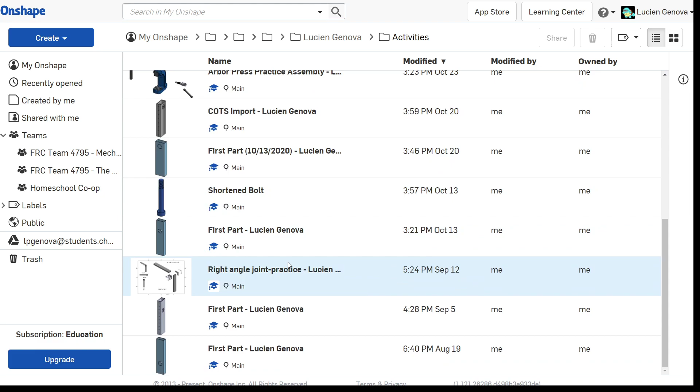So we'll go here to our team, and I'll go to off-season 2020, and I'll go to my folder, and we'll go to our projects folder. Now I got the activities folders. That's going to be full of all the activities I've been doing, because I have been doing multiple of each one, both practicing, developing them, and also filming these videos. But we'll go to our projects folder, and I'm going to go to Project 1, 2017 ball intake, and that was the task.

Reviewing the task, actually, let's do that real quick. What was our task? I'm doing this because keeping the task in mind is super important. What is your task? What does it mean? And how can you fulfill that task? That's what you figure out when you're designing. So the task this time was to intake balls, get them from the ground onto the robot, these little yellow wiffle balls from 2017. And I'll link the game reveal video from 2017 in the description so that you guys can watch that.

So we looked at some existing working solutions. I took pretty heavy inspiration from the Robonauts design, although I used some different geometries, some different configurations. Tried to make it a little bit simpler. I'll also link this playlist of robot reveals, that way you guys can do your own research, because doing research is an important part of design as well. It's one of the most important parts, because identifying the task and then identifying how other people have done the task, that's the way it goes.

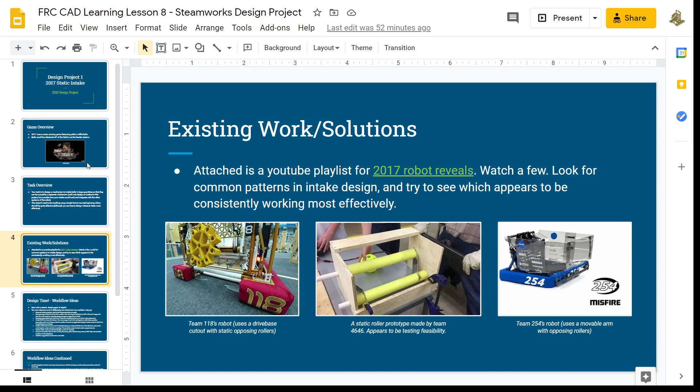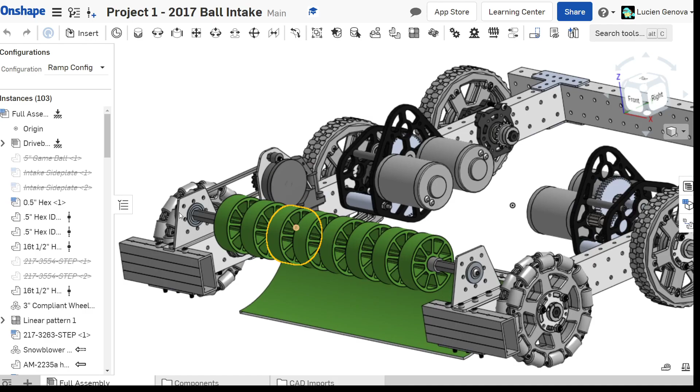Yeah. But yeah, so basically the task was to intake the little yellow wiffle balls from 2017, from the ground onto your robot. That's the gist of it. So here we have our intake, right? Starting off, it's a very basic design. You've got this shaft, which is spun by this motor by a chain. They're connected by a chain.

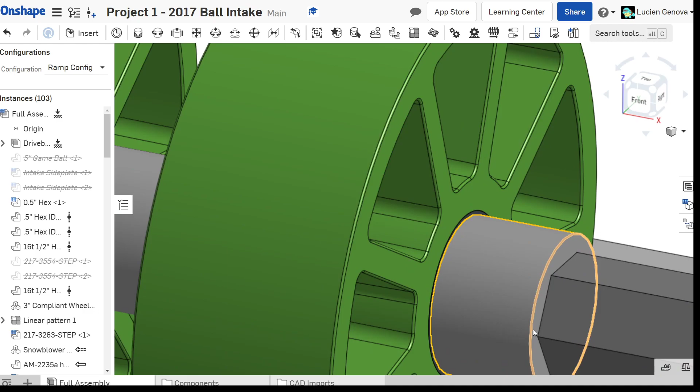And when you spin this motor, the shaft rotates. And this shaft is going to have wheels on it. If we go ahead and select this face here, we can rotate this around, and we can see this shaft can rotate around, and it would actually be going the other way. The shaft rotates around, and you've got wheels, you've got a ball that gets sucked up in there, right?

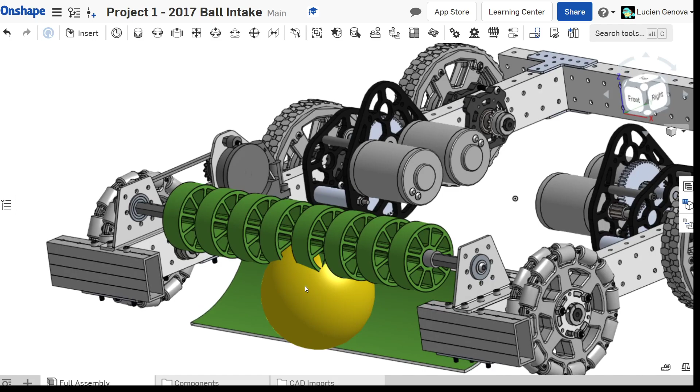So if we go to our demo configuration here, we can see that we've got a ball that's attached right in here, and it's just sliding along this ramp, moving upwards. If we go to the right here, we can see. Here, I'll do a section view so we can see it a little bit better. Move this down a little bit. Yeah, just like that. All right.

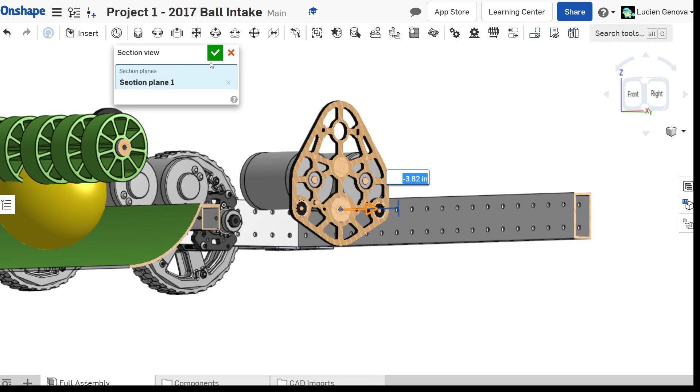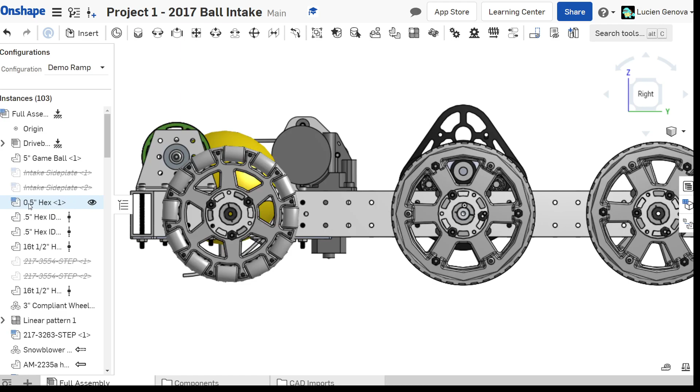Right, so we can see that this ball can move up and down along this ramp, up into the robot. That's the gist of it, right? Starts on the ground, your robot rolls up to it, and pulls it up this ramp right into the robot. So I'll turn off the section view there. It's kind of killing my computer, but yeah. And we'll go to our ramp config, and we can start to analyze this.

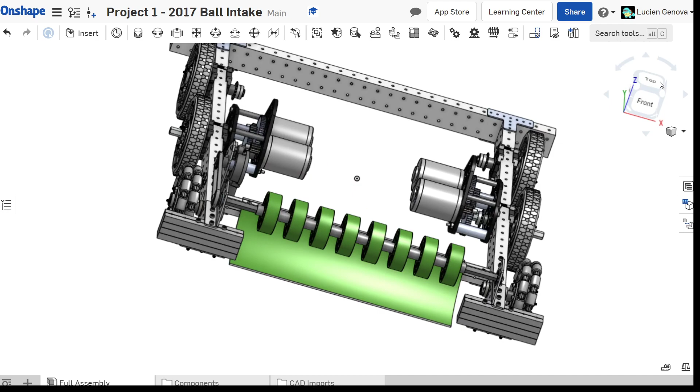So I'll go through my workflow first. The first thing I did was I made a sketch, and I sketched out everything that I was going to want to do, and I worked through that until I had a layout that I liked. So I did pretty much a top-down sketch from here. I want this frame cut out here. You have to have this much space for bumpers in the regulations, but I put this frame cut out here, and then I had a shaft mounted here with rollers on it, and then a motor.

Oh my God, what did I do? Oh, I made a new tab by accident.

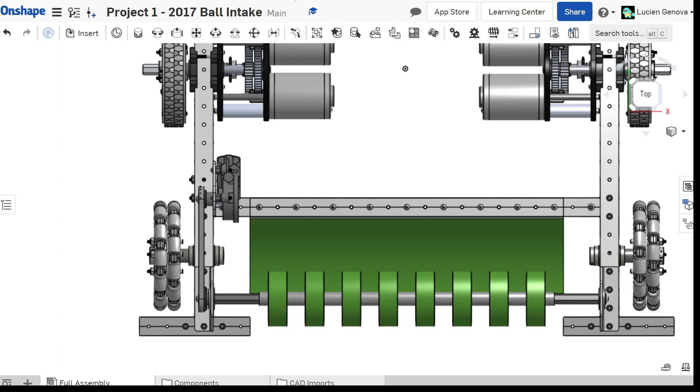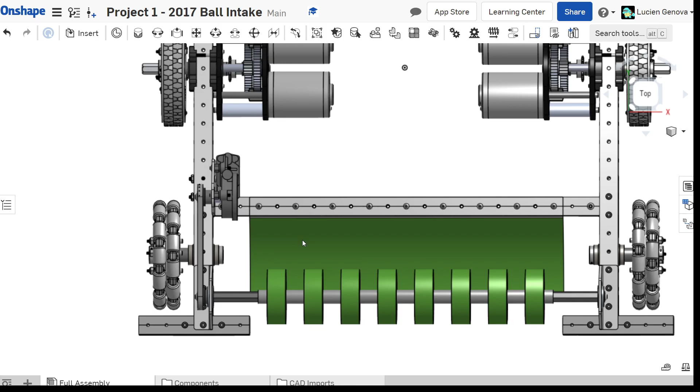Okay, so I had a shaft right here with rollers, and then that connected to a chain, and then that connected to the sprocket, which drove this roller shaft. And then you got some sort of backplate with some sort of sticky compressible material. In this case, a cut-up piece of yoga mat would work very well for this application, because these wheels are also compressible and a little bit sticky.

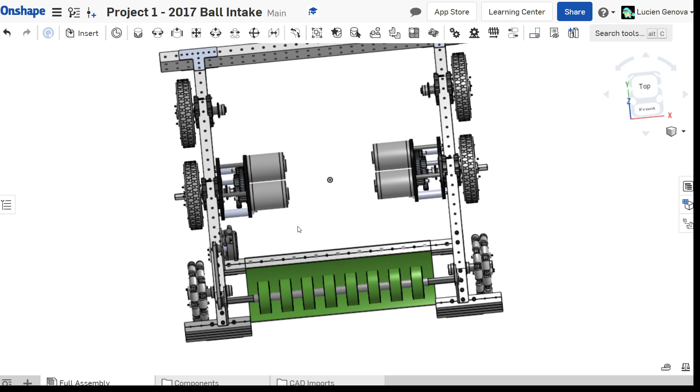They're squishy. These are AndyMark green compliant wheels, and the green ones are the squishiest. That's a common fact. So that's the gist of it, and I did that in a sketch. Because especially with common off-the-shelf components, this component here is at a set height, you can't change that. And this height matters, because that's the height that you come onto the ball at. So figuring out that spacing before you're constrained by common off-the-shelf components is super important.

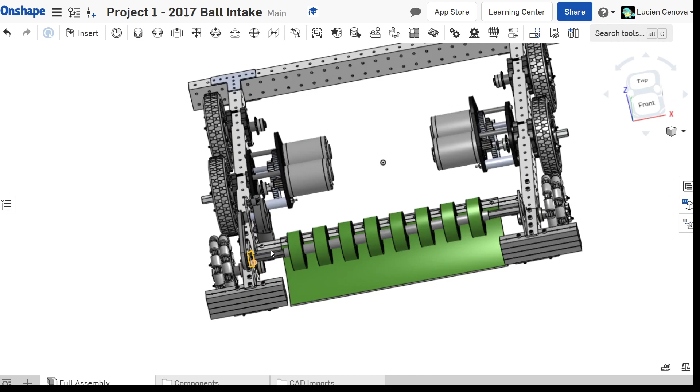So the first thing I did was I made a custom component. I made a custom side plate that housed all of the geometry I wanted. And I'll show you guys that. It's going to be here in intake, in intake side plate. This is the side plate here.

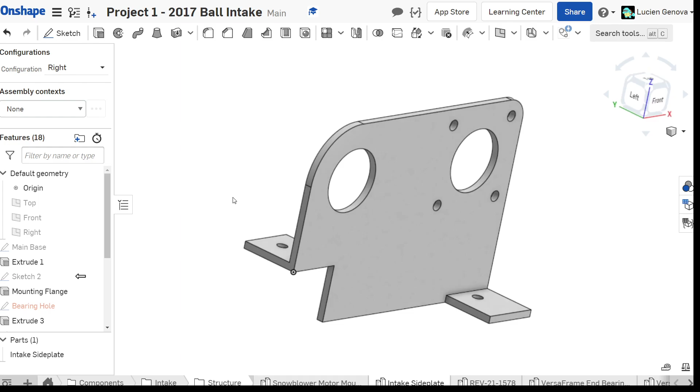If we switch our configuration to our right side here, we can see that there's a hole here for a bearing, and there's a hole here for another bearing with motor mounting holes around here. That would be mounting for a VersaPlanetary with some sort of motor on it, and there would be a chain running between these two. That's the basic gist of it, right?

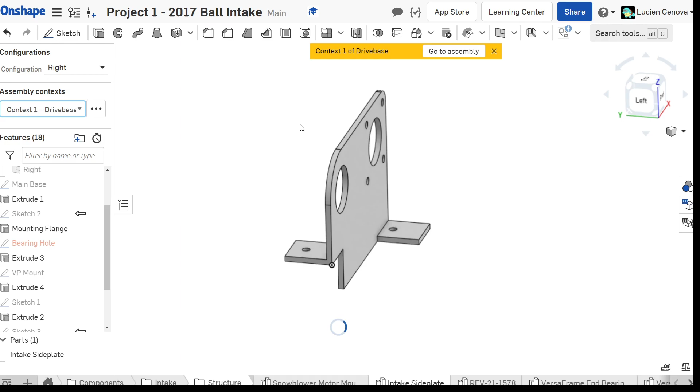And then this spacing from here to here is driven by where you want your rollers to be in proportion to the ground, which is also in proportion to where the ball is. But yeah, so I'll look ahead and go to this context. Now this is going to be an older context, so this assembly is not going to be updated, right? This is an older version of the assembly.

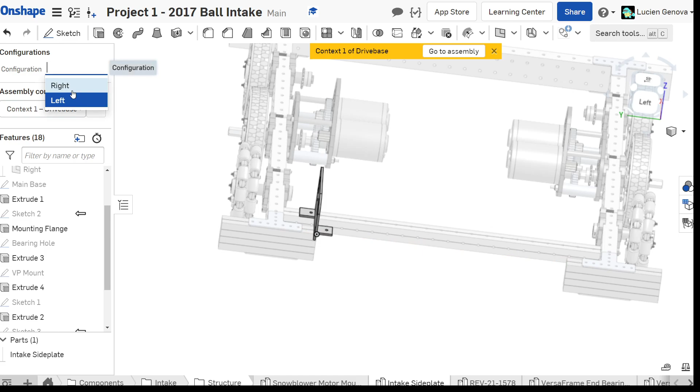This bar is closer, and this thing here, you can see how it's mounted, right? You have a flange coming out for the mounting here, and a flange coming out for the mounting here. That's the main gist of it. If we go to our left side configuration, actually no, our left side configuration wasn't on there, right? Our right side configuration, just like that.

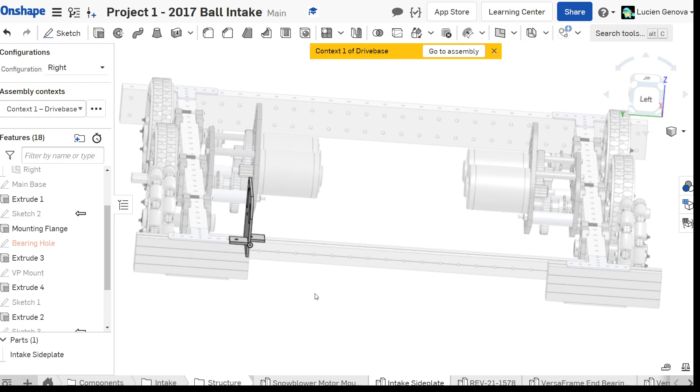And then you would have a roller, right, coming out of here, and then your motor would either be coming out this way, if it can fit within this space here, or this way. And the problem with it coming out this way, actually, is that you'd have to extend this frame, because if you wanted to intake balls there, they would come up and they would hit the motor as it came out, right?

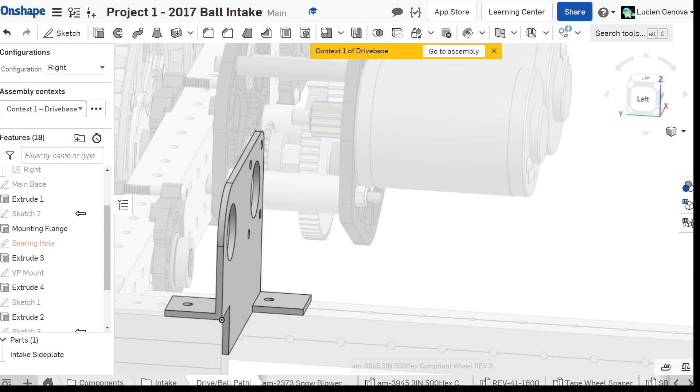If we go into drive and ball pathing, right? If you've got some sort of VersaPlanetary like this, and it's mounted on this bracket here, that would be sticking out this way, you're going to block your ball's path. And I'll show you, let's see, here's our UltraPlanetary as well, and you can see that's sort of the same format, right? Short little gearbox and a motor on the end.

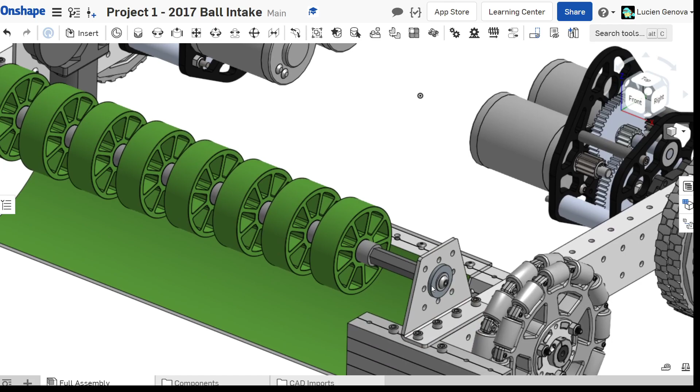So if we go back to our assembly, this is actually in the drive-base context, but we'll go here to our full assembly, and I'll overview a few more things about this design. All right, we've got our snowblower motor here, which drives the sprocket, which drives this roller here, and then we've got these common off-the-shelf brackets from AndyMark that hold this roller shaft on.

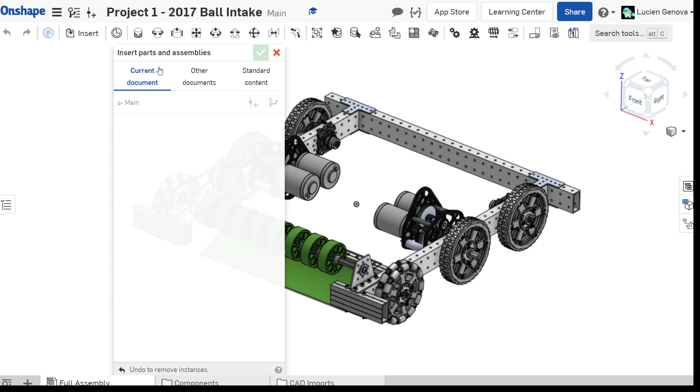So the first thing I did was figure out the geometry, and the next thing I did after that was I went ahead and looked. I was like, okay, so how can I get this geometry into a thing that's actually practical? Of course, you could make the intake side plate, go ahead and insert this in as a reference. You could make the intake side plate. It's not impossible to do, right?

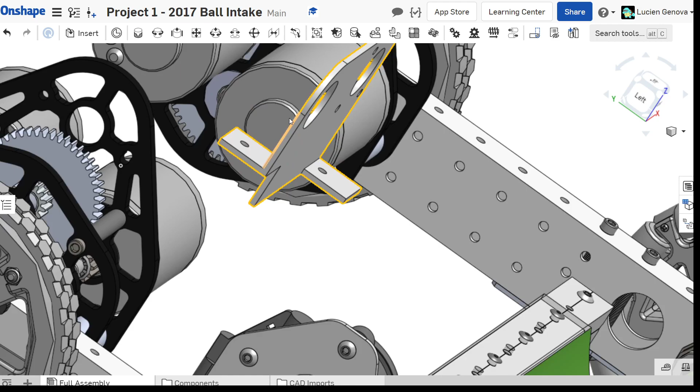This is just a sheet metal part. There's a flat part, and then you bend this flange out and drill a hole in it, and then you bend this flange out the other way and drill a hole in it. They're 90-degree bends in 1/8" sheet metal. It's actually pretty easy to do, and there are ways to represent it in CAD so that it has a flat pattern, so you could use that to cut it and then bend everything.

There are ways to do that, but I didn't actually want to use something like this because you don't need it, right? You have something that you can buy, and that's much easier than making this. You can make it, but you don't have to. And so, you want to give the mechanical team the easiest job they can have. Of course, that shouldn't be at the expense of your design working.

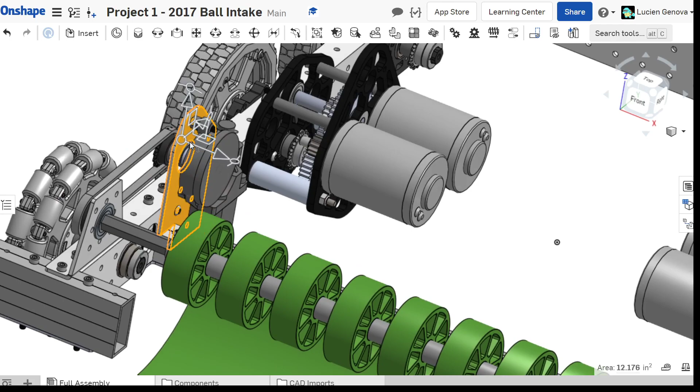I do have a custom sheet metal part here, and that's to mount the motor here. And there's a very good reason for that. The reason being, there is a custom part to mount that motor. I'll go ahead and delete that. There is a custom part to mount this type of motor, which is a snowblower motor. You can see it's got a little motor shaft down here, little motor can.

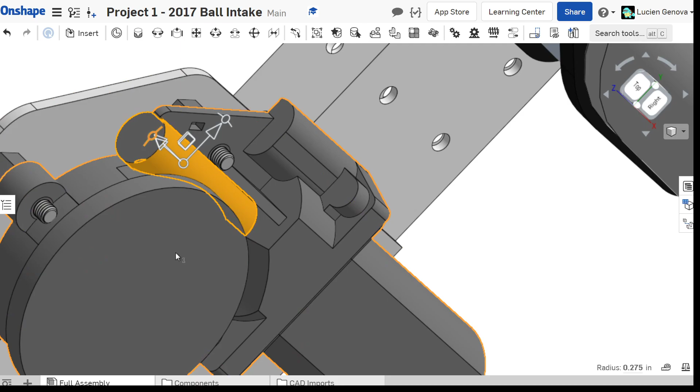Then you've got this thing coming up in here, and you can see the geometry. You've got your worm screw, right? You've got a worm drive, which is basically just like a screw. And then you've got a gear in here, and that screw spins this gear, and it gives you an output of about 100 RPM, so 100 revolutions per minute.

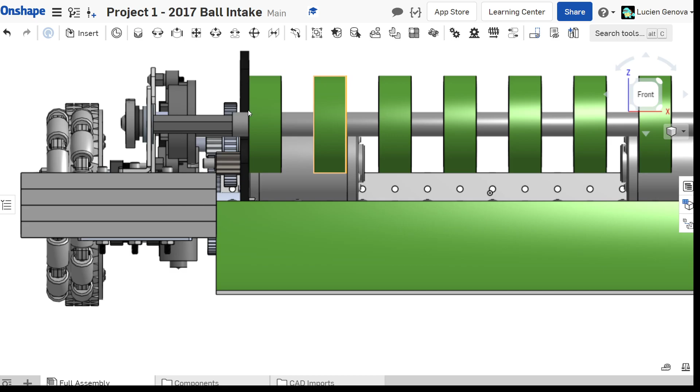That's a really good speed for an intake like this, and it gives you some good strength on that snowblower motor. So that's a cheap alternative, and I also chose it because it fits within this frame constraint, like what I was talking about before. Otherwise, you'd have it sticking way out, right? It fits within this frame constraint, and that's very important. It's also not too large. Like, the size is up and down, and that's much better than it being side to side.

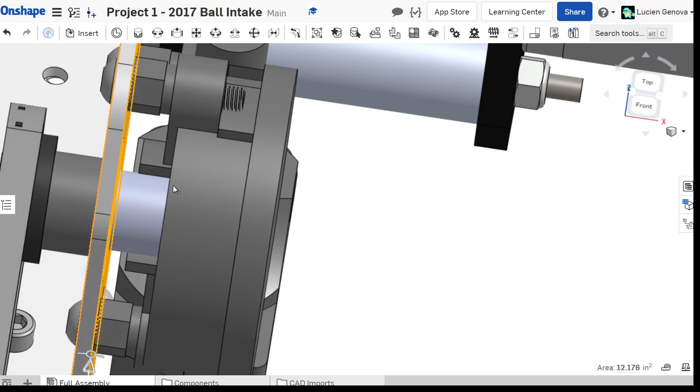But yeah, so the reason I made this sheet metal part here, and this is mounted with standoffs, because it has to be a little bit away because this motor comes out farther than the mounting holes, which seems like a silly design choice, but that's how it is. So you've got this, a very simple thing. You've just got holes here to mount to the chassis, and then you've got holes to mount to the motor. It's a very simple part.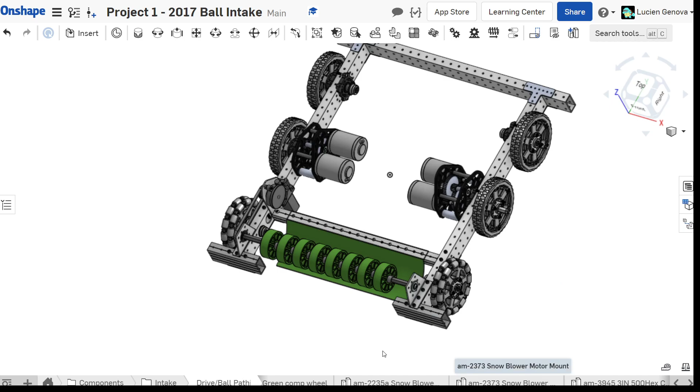If we go to our components and find our snowblower motor mount, there's the motor itself, right? Here's the mount. You can see that this mount is actually up and down. The triangle is up and down. And if you look at our snowblower motor, that would stick out sideways. And we don't want it sticking out sideways, we want it sticking down.

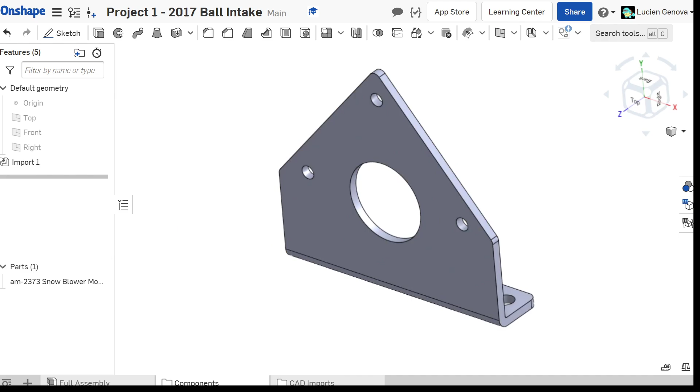Because that's much easier to manage space-wise, and I don't want to give all the other designers a hard job because I decided to take up too much room with my design. Like, that's kind of a dick move, right? You don't want to do that. So you want to use as little space as possible, especially on a robot like a 2017 robot where most of the space inside of the frame is dedicated to storing balls, right? You want to be able to do that as effectively as possible, so something that's sticking way up isn't going to be ideal. So that's why I didn't use a COTS component there, instead using this.

And it's also fun to give mechanical team a few headaches and nightmares, but also learning experiences and jobs, right? Them having jobs to teach new mechanical members is pretty important. So yeah, they should have something to do. That's at least the mentality there, right?

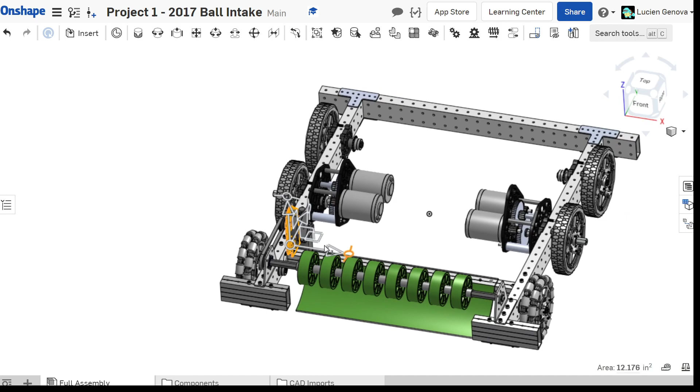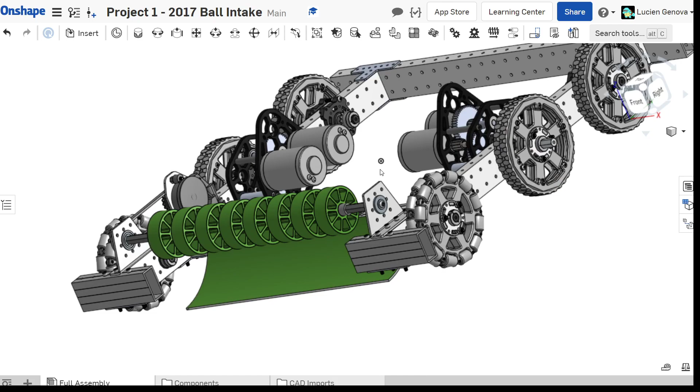And then I've got this back plate here, which is just designed out of polycarbonate, and it mounts off of this central support. And this central support actually has a few functions. First, it serves to mount this back plate off of, right? As I showed before, the ball kind of rides up that as it goes into the robot, and these act sort of like a revolving door, these spin, and then they make the ball roll up this ramp.

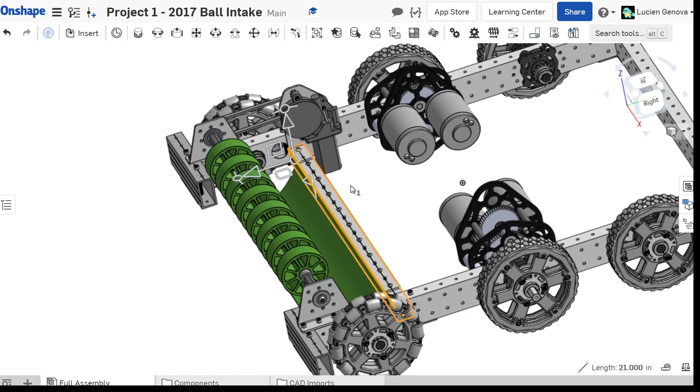But then you've also got this cross member here, which also has a few functions. The first function being to mount this back plate, right? You've got a bunch of rivets mounting that. And then the second function being to strengthen your drive base. That is really important, having a strong drive base, because without this, if we go ahead and hide this, I'll show you.

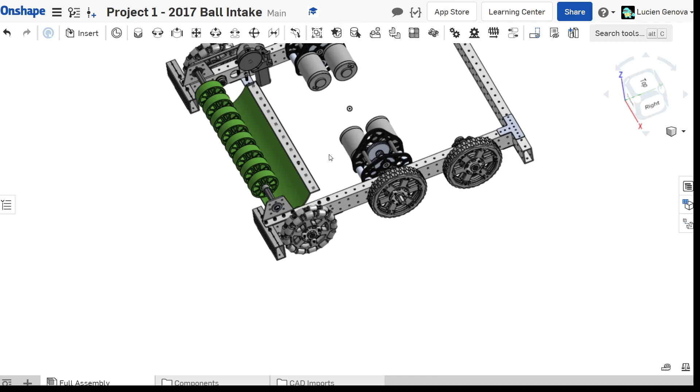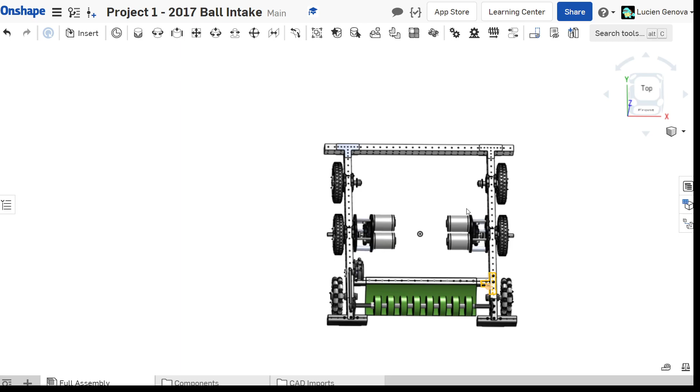Without this, the drive base, if you went on top of it like this and you squeezed it this way, that would be bad because it would kind of become a triangle, and you don't want a triangle drive base, right? You want a drive base that works, and the wheels shouldn't be pointing inwards. So you want some sort of structural frame member there, right? And if you have a cutout in the front, you usually need that behind the cutout. That's the idea, at least. And then it also acts, like I said before, to mount this backplate here.

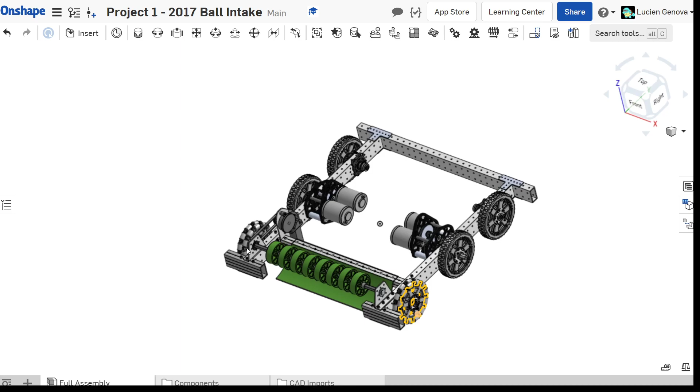Okay, so that's basically the overview of the design, right? I didn't want to make it too complicated of a design. It's quite simple, actually. Just got a shaft mounted by bearings. You need bearings for rotation, usually.

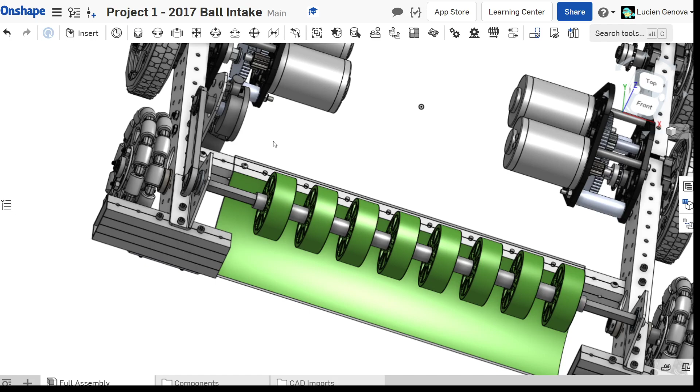To these common off-the-shelf brackets, and I decided to use them because they sort of gave me the geometry I wanted. That's what you're looking for. Finding common off-the-shelf parts that fit the geometry you want is pretty important, and it's one of the longest processes because you have to look on different websites, try different files out, and just see what's what. That's why making custom components like this is sometimes the way to go. If you can't find something that will do what you want, sometimes you have to make a custom thing. That's just the reality of it.

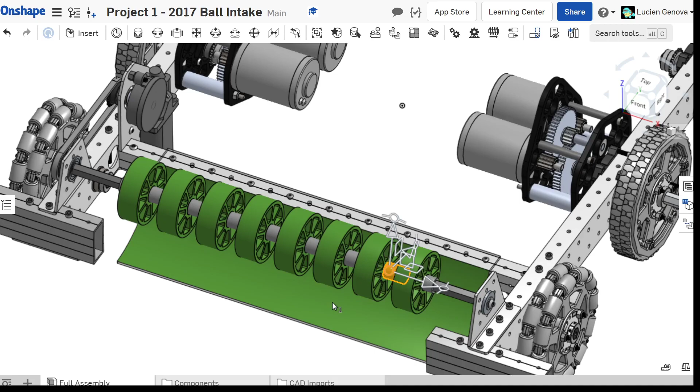But yeah, I've got a COTS component here, shaft here, and then these AndyMark compliant wheels are COTS, and then these things in between them. This is actually duct tape, just a CAD representation of duct tape. That's what we use in our design, and it actually works really well. It serves to keep these from moving axially with the shaft, keeps them from moving this way.

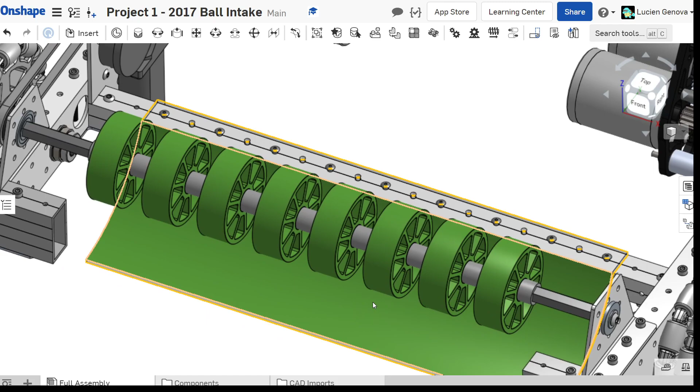It just sticks onto the shaft, and then we wrap it around till it's tall enough to keep the compliant wheels from moving. Saves us a lot of money on shaft collars in between all of these, and the spacing doesn't need to be precise, so we just cut roughly an inch and mount them between each other, just like that.

Now, I didn't spend too much time editing the drive base for this, because if I wanted to design a good drive base for this game, I would have. This is not really an ideal drive base for 2017. You'd want smaller wheels, gearboxes farther back or lower down, basically give you as much space inside of the drive base as possible. But that wasn't the task. The task was just to make this mechanism and design it in a drive base context, without doing much to the drive base. Just make this mechanism feasible, make it so that it can work. Make a mechanism that does this task. So that's basically how it went.

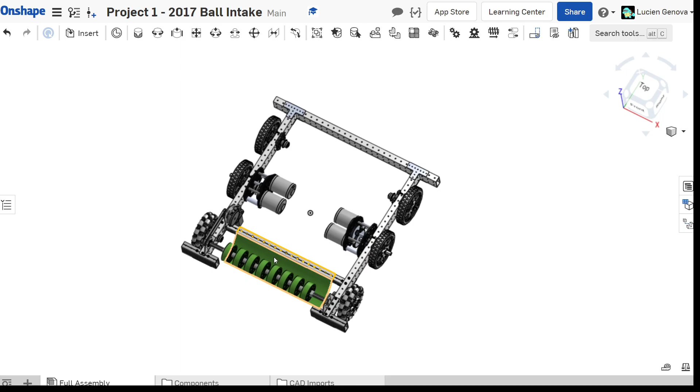So now I'll get into the second portion of the video, which is just a design review of the concept that we had. I'll be looking at this from a neutral perspective, and I'll say some pros and some cons of it. What could be better? What's bad? What's good? And what could be improved? Good, bad, and the ugly. Although I don't think it's too ugly. I like the little green accents here.

Yeah, so starting off, from a neutral perspective, this is the role-playing portion of the video. I'm stepping into somebody else's shoes, although I am alone in my bedroom filming this, so it may have other connotations. I'm just going to use the word design review for now. Basically, I'm just going to come at this from a neutral perspective.

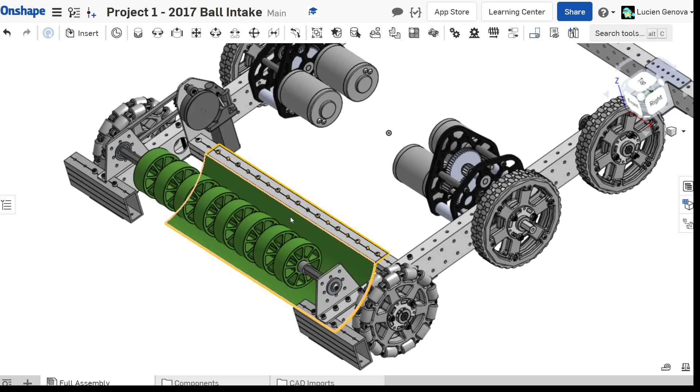So, starting off, what are some things I see? Does it fulfill the task is my first question, and I think it would, because this geometry looks pretty tried and tested. You would have to test this in prototyping, and you would want to prototype this mechanism pretty heavily, because there's many things you need to test mechanically, like how compressible are the balls, how much squish do you need on the balls?

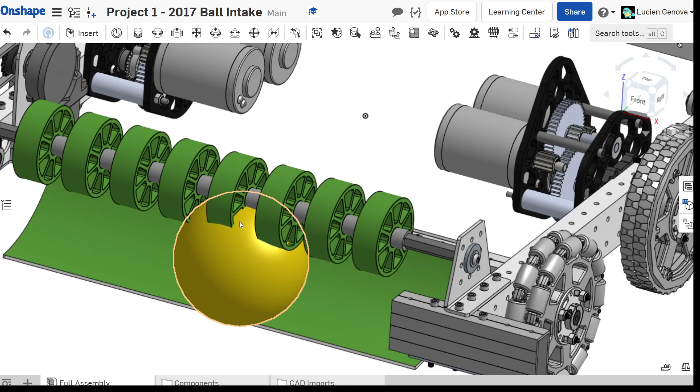What material should you use for the compliant wheels? There's different colors of compliant wheels with different hardness ratings, and the green ones are the squishiest. That's common knowledge. But you could test, should we use harder ones? Should we use smaller compliant wheels, or move this up? I would say it might be good, because this ball is almost touching this shaft here. You'd probably want to move this up about an inch just to offset it so that this spacing worked a little bit better.

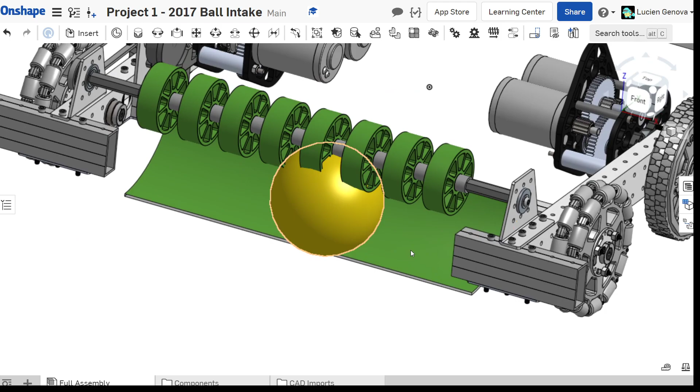You'd also want to test if a yoga mat backplate here really works to draw the balls in. I don't really see a reason why it wouldn't work, as long as it's sticky enough to grab onto the balls. But maybe stuff slips out, or maybe stuff jams. That's totally possible. So it's worth looking at, does this actually work?

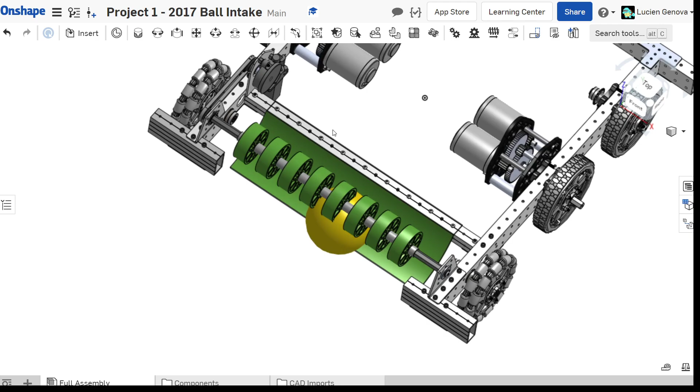And that's something you want to test in prototyping. First, you test feasibility, like, does this work? And then second, you test specific things like spacing and material choices.

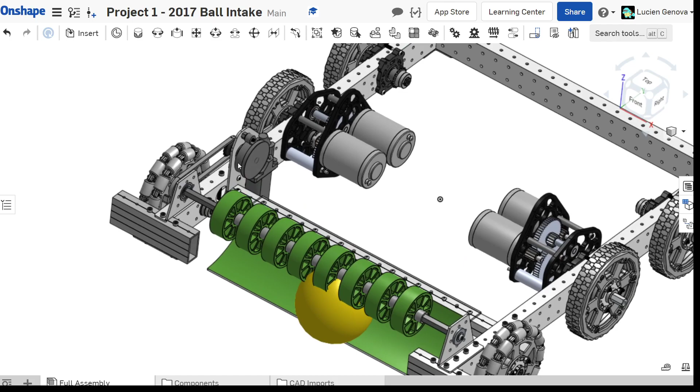All right, next thing I noticed about the design, I like the use of the snowblower motor. I think it fits pretty well with the design. One thing I would say though is that it could be moved over to the other side, right? This snowblower motor, if you flipped it around, and I'll go ahead and do that real quick, right? Paste that in. If you flipped it around, we'll rotate it 90 degrees, 180 actually.

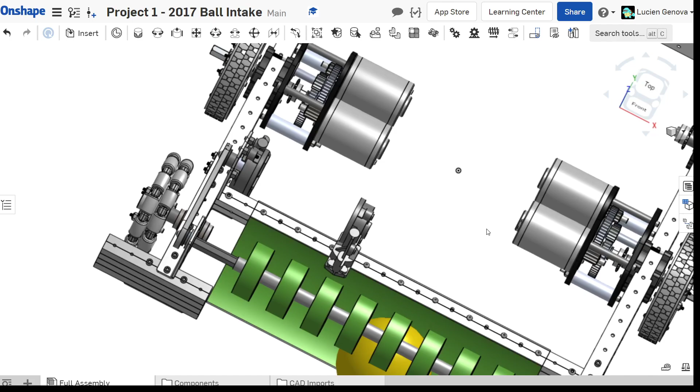If you flipped it around, it would look like this, right? The little shaft end, the little motor end, would be sticking out the bottom. And so if we move it to this side of the drive base, right, we could tuck it in there all nice like. And I think that might be a better use of the space than having it sort of come out behind this crossbar here.

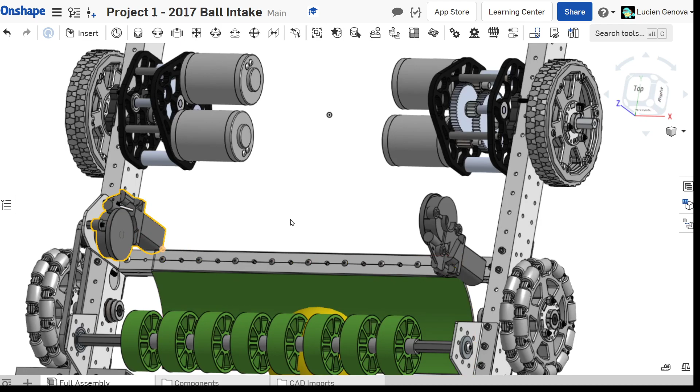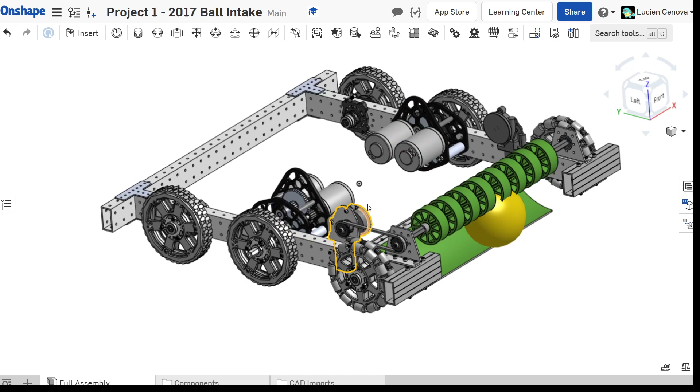You can move the crossbar back like a half an inch, and then put this snowblower motor down in there, and that would save you a little bit of space horizontally. And I think that could be a better use there. So that's one thing I would critique, a little bit of space wasting there, although it's really not a huge issue, right? You save like 2 inches from doing that. But if that is 2 inches that can be used somewhere else on the robot or with some other mechanism, then it's worth doing, right?

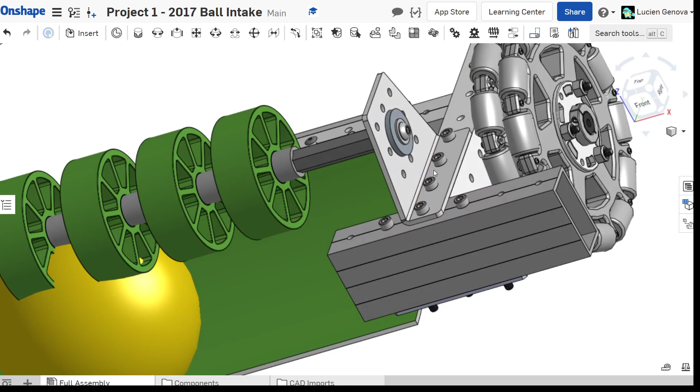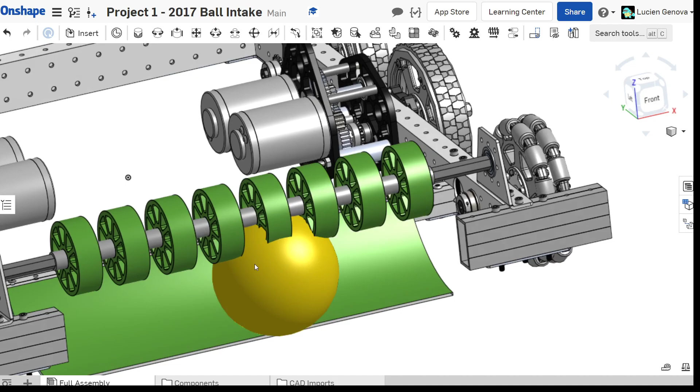But yeah, another thing, like I said before, you would want to offset this upwards. This is too much compression. Even with prototyping, this isn't even worth giving to prototyping because you'd just be breaking something. You'd be bending this shaft or breaking these rollers. The squish is good. You want like an inch to a half inch of squish, but having squish to the point where the ball touches the shaft, that's not the best.

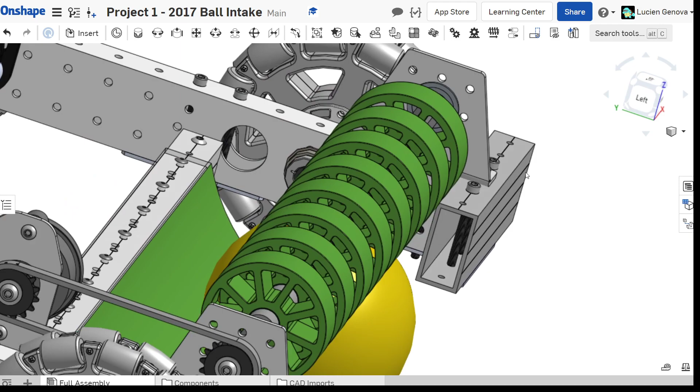So this is again more of a nitpicky critique. The whole thing as a concept works well. But yeah, I would include some sort of spacer here, either moving this a half inch up or an inch up. And that would be pretty easy to do. Honestly, it would not be that hard to do, so it's worth doing. So including some sort of spacing there so that it fits a little bit better. Just to add some spacing in there to give this a bit of an offset.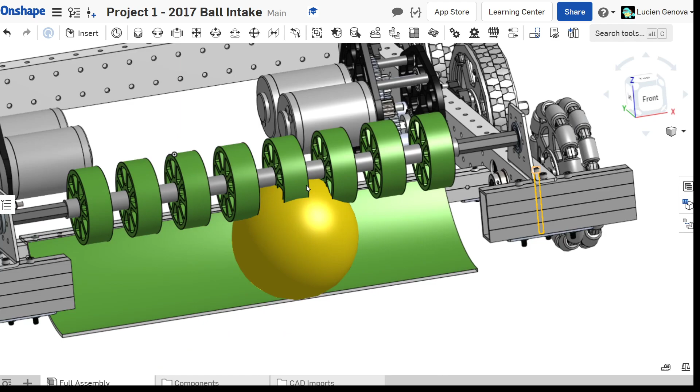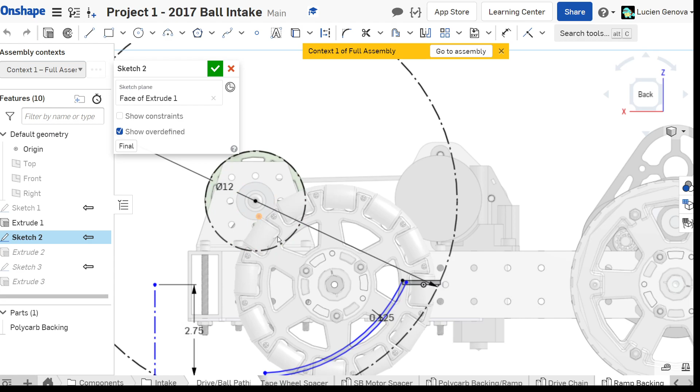And then you could also move this pipe back here, right? If we go ahead and edit this in context here, we can see how this backplate was made. And that's basically just using the geometry from the part, right? If we go to our second sketch here, we can see that we've got the radius that we want to sort of follow, right? So 6 inches, or the diameter here is 12, right?

The ball is 5 inches, and then this is a 1.5 inch wheel in radius. It's a 3 inch wheel in diameter. So 1.5, you want like a half inch of compression or squish. Maybe 1 inch would do actually, because these are pretty squishy. So 6 inches is a safe radius to go by. You would want to move this up like a half inch, just so that this ball will fit with this.

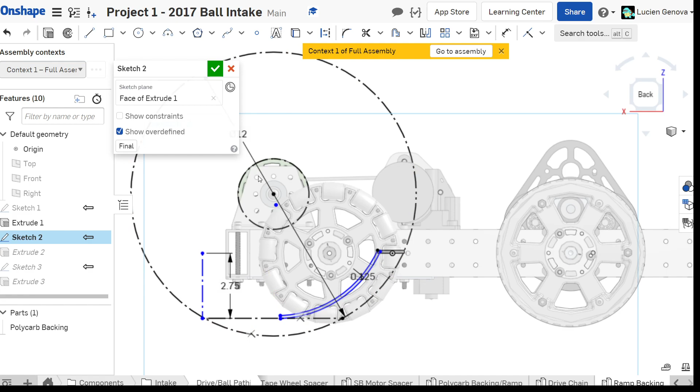And then you can see that this was modeled to have the same center and to also fit there. And you would want to also move this back and have some sort of bigger radius between there. If we look at a dimension here, between here and here, that's too small, right? 3 inches, that's not enough for a ball. That's 5 inches in diameter. Even if you have a half inch of squish, that's still giving you only like 4.5 inches. That was like roughly 3 inches that we saw just there. So that's not going to be enough.

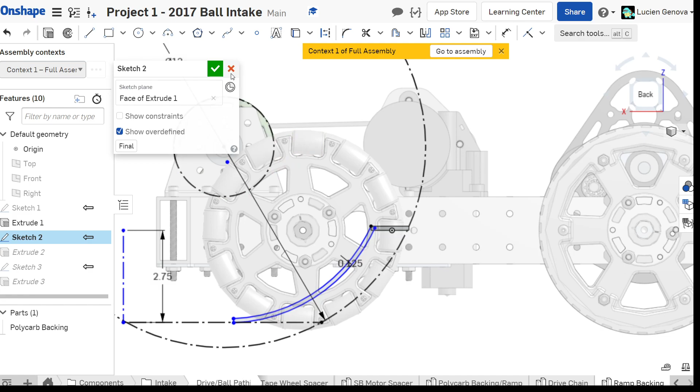If we check that and we go back to our assembly here, we can sort of conclude. So two main things. Figuring out spacing for the motor a little bit better. It's not a huge nitpick, but it's a little bit of a thing. Figuring out some sort of spacing for the motor, some sort of spacing alternative, and then also figuring out some sort of better spacing for this here and here. This ramp here and here.

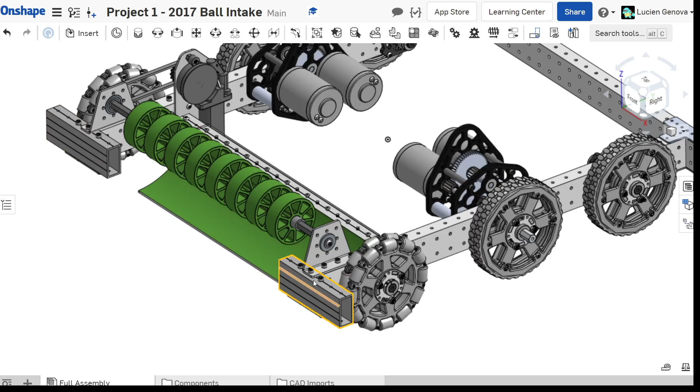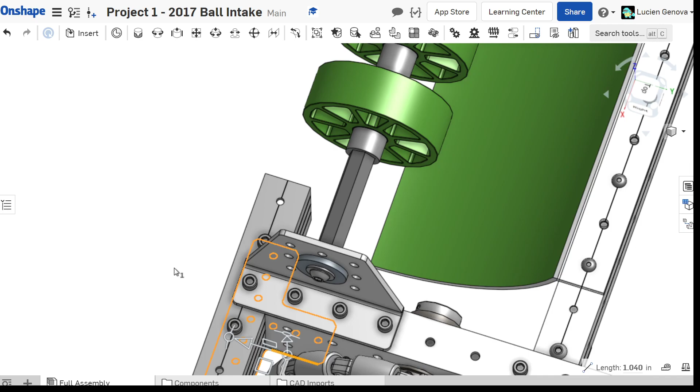Another thing I might say is that these would be a little bit weak by not having a T-gusset on top. And I get why that's done, because this has to come over and mount to this, and the T-gusset's not long enough. It's not the same length. So there would be like an overhang, and you don't want that. You could fill it with spacers, but you don't need to. And this front plate here is really only to hold a bumper. It's not to do anything super structural, so you don't really need to worry about that.

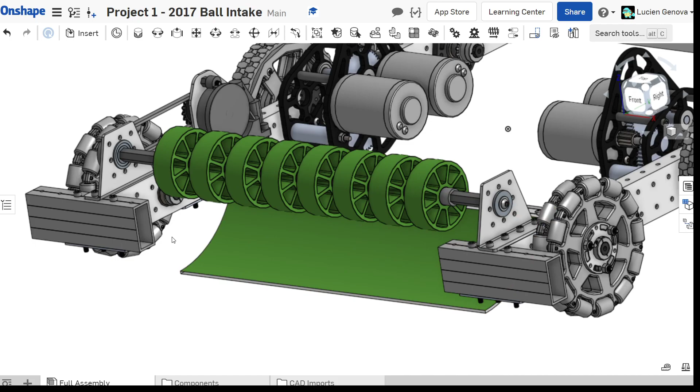And then I think the last thing is maybe I would worry about this catching on the ground if it's just polycarbonate, and I'm assuming it would be deformed, like bent somehow with heating, like put a heat gun all over it and then bend it into the shape you want. I would figure out maybe some way to support it off of this frame on the front there, or maybe just make sure it doesn't scrape along the ground so that when you're driving along this way, it doesn't fold over backwards and your whole robot does a wheelie over it.

That would be bad. That would be bad juju. That would be no good. But yeah, so figuring out some way to maybe support that could be important. Again, that's something that would be tested with driving practice and prototyping.

But yeah, overall, this is just a design review of this mechanism, like what it was sort of designed to do. We started with the task, then moved through some of the workflow that I did, and then I went through the final product that I came up with, and then we did a design review. That's going to be basic standard procedure for designs, and it winds up resulting in a design that's a little bit more polished and a little bit more effective.

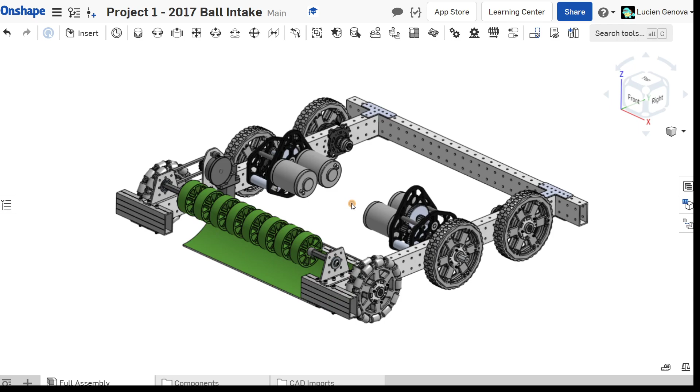And this project is sort of a first project. It's okay if you guys were a little bit off the mark with this. There's no right answer, but there are wrong answers. I'm not gonna lie. So a few hints for if your design is not really doable. First of all, if you can't make it in real life, it's not gonna really work out. And second of all, if you can't use it, if it's not usable, if it doesn't satisfy the task. So usually the major pitfall is that it satisfies the task, but you can't make it.

You'll see people make some sort of big, huge, complex part that they didn't really think about how that would actually be made mechanically. And that's okay, that's normal. That's what I did. My first year, I was asked to design an intake, and I designed something that was completely abstract and didn't make any sense. It would have satisfied the task, but there were no common off-the-shelf parts on it, and it wasn't doable. So yeah, that's totally fine. Figuring out ways to make it doable, that's most of the legwork with CAD. We'll work on that a little bit more in the future as we get into some more complex projects.